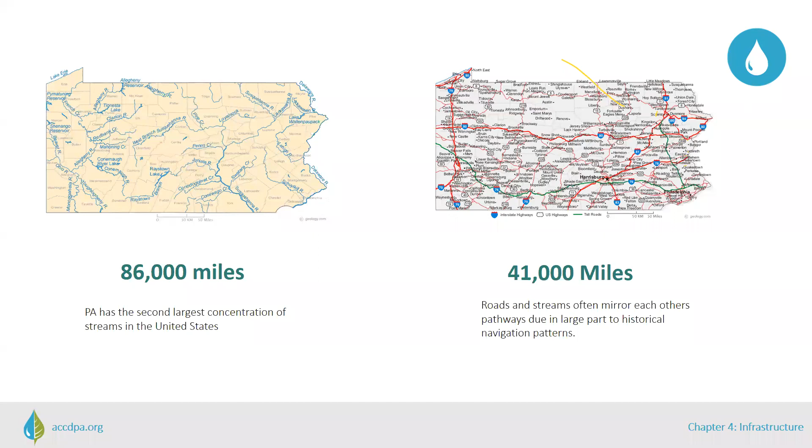Roads and other infrastructure impact streams in several ways. Over time and with daily use, road conditions can deteriorate. As this gradual erosion happens, that sediment can be transported and deposited into streams. Dirt and gravel roads in particular can dump large quantities of road material into streams, particularly during storm events.

I'm going to play this short clip of a dirt and gravel road in our county. This road was part of a Dirt and Gravel Roads grant project. We helped to install some improved drainage features to reduce the impact this road has on the stream parallel to the road surface. If you take a look, you might notice how the water is creating these deep cuts in the road surface. Where do you think that material is going?

Now notice when the road surface changes. This change that we see in the clip is where additional drainage methods were incorporated in order to manage the stormwater more effectively. This had two important outcomes. It reduced this road's maintenance and improved its overall functionality, but it also reduced sediment loading and improved stream health in this particular section.

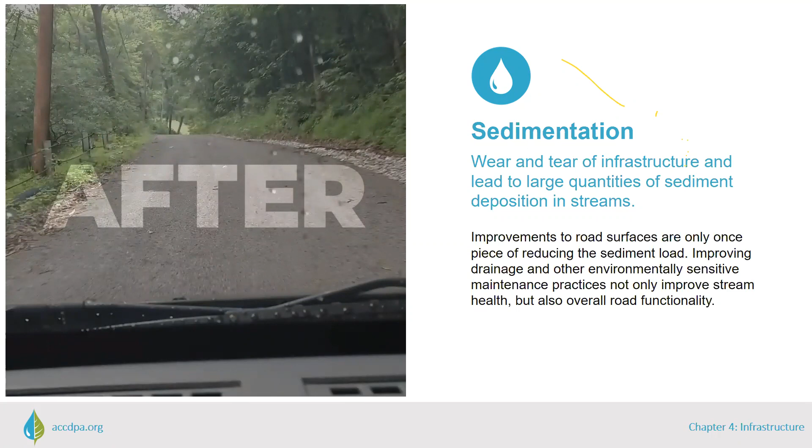There are ways that roads and infrastructure can contribute sedimentation in streams, but they can also be impacted by natural processes of erosion and sedimentation caused by the streams themselves. Remember, streams are constantly changing. As I mentioned, the location of roads in close proximity to streams was very convenient at the time, but now there are plenty of instances where streams are cutting into the road.

Here's one photo of a paved road in Allegheny County on the outside bend of a stream. Below the road, we can see how the stream is cutting into the bank and has even exposed an old utility line. If this was an active utility line, it could be a dangerous situation. If the line became damaged, it could also discharge pollutants into the stream itself.

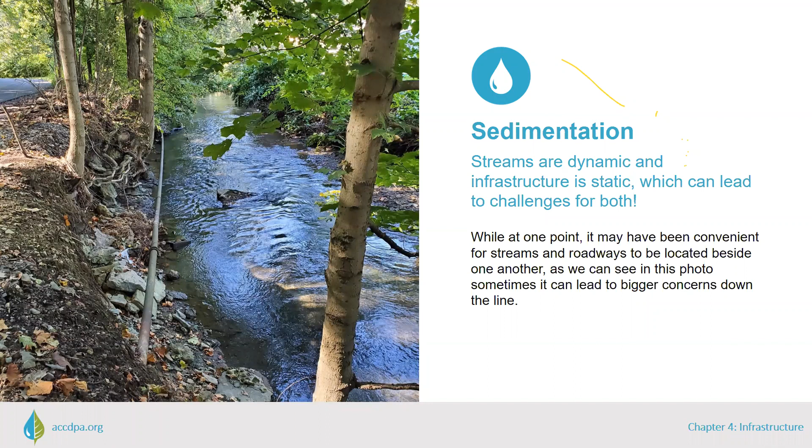Water and infrastructure is all about flow. How is the water moving across the surface and finding its way into streams? These flows of water are often referred to as drainage patterns, which can become disrupted through the installation of infrastructure. For roads, this can mean changing the topography or diverting drainage using berms or ditches that trap water or convey it in concentrated runoff. Concentrated runoff can carry with it road salts, litter, sediment, oil and gas residues, and other pollutants that then enter the stream without any opportunity for treatment beforehand.

These pollutants change the stream environment and can harm wildlife. Road salts, for example, can increase the salt content of streams, making them uninhabitable, in some cases, for freshwater fish. This picture is obviously not from around here, but I picked it because you can see how the road is cutting into this natural landscape and could be changing the way water is flowing across this surface.

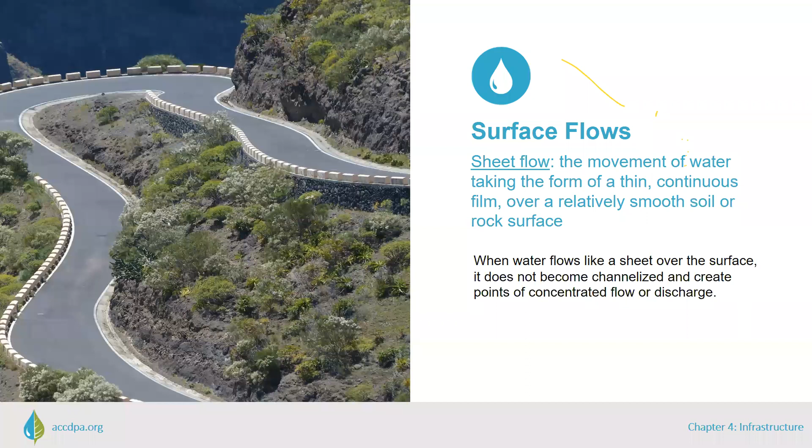Other infrastructure designs can also alter drainage flows. The first two images here represent changes to surface flow to purposefully concentrate runoff. But as you can see, the water has a mind of its own and has eroded the area around the pipe in this first picture. This second picture shows what a concentrated flow might look like as it enters the stream. These infrastructure designs are made with the human use in mind, but both streams and infrastructure systems tend to have better health and durability when working within the flows of nature.

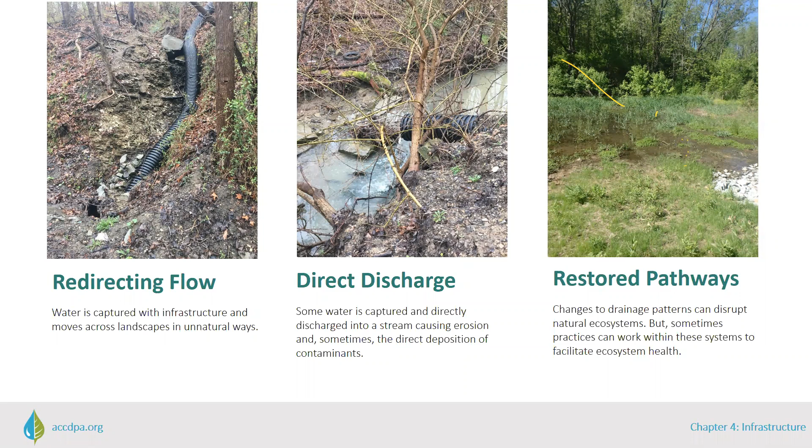I want to briefly mention, before I continue with the problems that arise between streams and infrastructure, that the story is not all bad. This third image is a positive one I wanted to make sure I stuck in here. This was a road drainage project that was part of a low volume road grant, and this project captured stormwater and natural springs that were flooding the road and diverted them into this grassed area, which became a restored wetland. Wetlands are great because they help in protecting water quality and also provide important habitats for wildlife.

Another type of drainage interruption is impervious surfaces. It seems pretty obvious that a parking lot would not allow stormwater to infiltrate in the same way that an open field might. But there are additional concerns regarding how water is conveyed from these impervious surfaces into nearby water bodies. With an impervious surface, pollutants and materials carried by water do not have the opportunity to filter before entering the streams and waterways. So we see similar issues with roads and concentrated flow that I mentioned in the previous slides. Take a look at this graphic.

Notice how in the impervious ecosystem on the right, we have 55% of the water being transported as runoff, versus the situation with natural ground cover where 50% of the water is infiltrating. Imagine the sheer volume of water and the impact it might have when we think about the fact that an inch of rain on just 1 acre of land is 27,154 gallons of water.

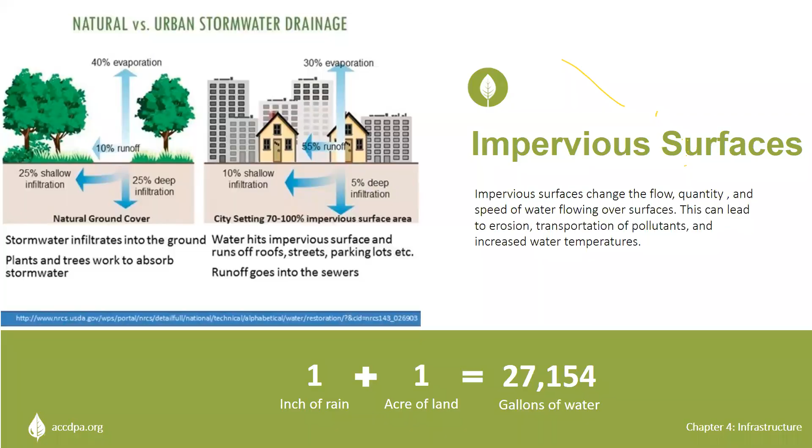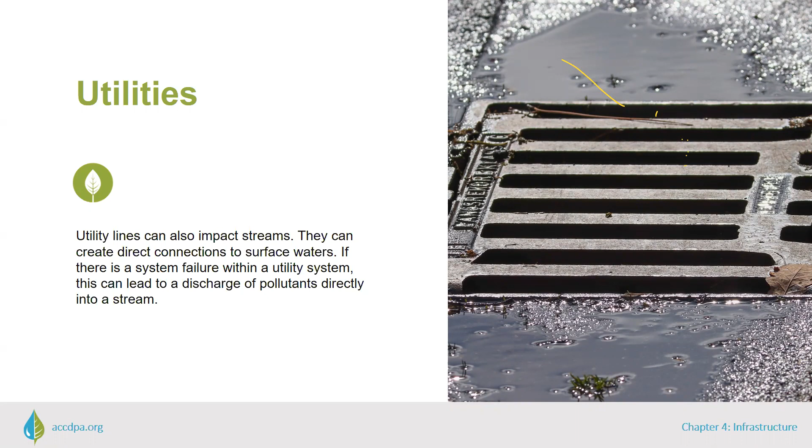In addition to interrupting drainage patterns, infrastructure like utility lines can also impact the health of a stream. Utility lines, like roads, are often located beside streams for both convenience and access for maintenance. These lines can cause damage to streams during installation, as well as during routine maintenance because of the disruptions to the habitat and ecosystems while work is being performed. In some cases, damage to utility lines can also cause issues with materials being deposited into the stream. In extreme cases, burst sewer lines can lead to disastrous stream health consequences. But even in more mild cases, damaged utility lines discharge materials into a stream that are not designed to be there.

Building infrastructure in and around streams can be tricky business. Some of you may be familiar, but part of the responsibilities at the Conservation District is to make sure that activities that would change, expand, diminish the course, current, or cross-section of a water body are monitored. This happens through our Chapter 105 program, which is delegated to us through the Pennsylvania Department of Environmental Protection. This program focuses on 3 aspects.

The first is permitting. ACCD reviews, receives, and approves general permits, which cover specific structures and activities that might impact streams. Some examples include utility crossings, minor road crossings, and fish habitat structures. A person may not construct, operate, maintain, modify, enlarge, or abandon a dam, water obstruction, or encroachment without first obtaining a permit.

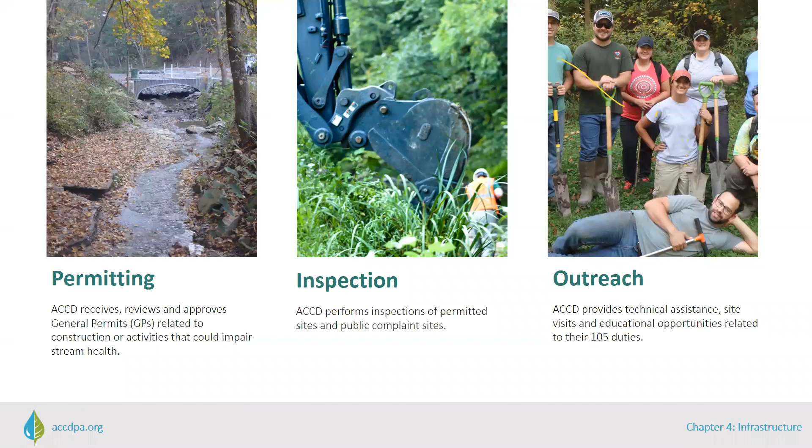The second piece of Chapter 105 is inspections. ACCD performs inspections of sites where we have issued permits or if we receive a complaint about a 105 related issue. And thirdly, ACCD works with contractors and the community to provide technical assistance and educate the general public about our programs. This program can be particularly important when it comes to stream crossings, which I'm going to dive into now.

Stream crossings are another piece of critical infrastructure that can have a big impact on stream health. Stream crossings have a lot of shapes and sizes, from bridges to small crossings on a driveway. The shape, size, and positioning of these crossings can either work with or work against a stream and impact health. Streams are powerful, so when designing infrastructure that will capture, direct, or be used to cross over a stream, there is a consideration for the ebbs and flows of stream surges.

One approach to this has been to think about the velocity and power of a stream and if the water were to shoot through the pipe. This was a pretty typical way that structures were engineered. Designing a stream structure to handle the flow of water considers a stream from an engineered perspective rather than an ecosystem perspective. And as a result, structures that focus on quantity and velocity of water over environmental components of a stream can lead to issues.

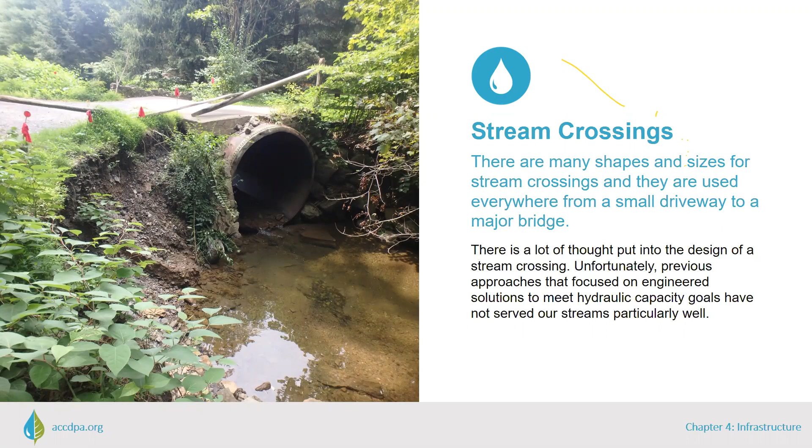There are 4 examples I'm going to talk about today that relate to how undersized stream crossings can negatively impact stream health. They are that it disrupts stream continuity, decreases or increases flow speeds, creates ponding, scouring, and erosion, and can cause flooding.

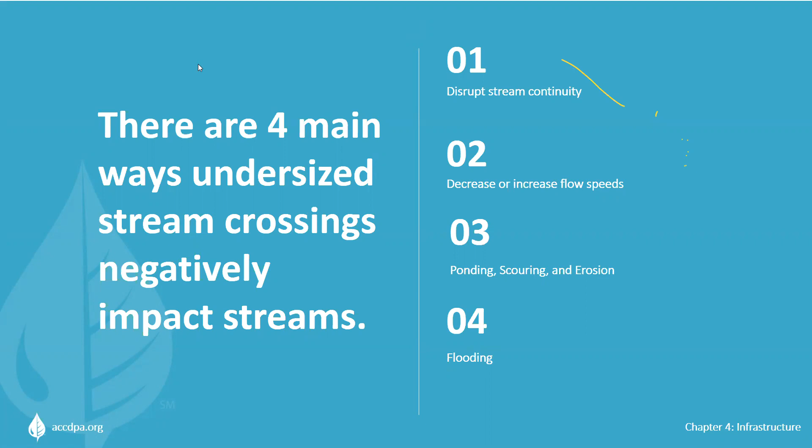Stream continuity is the concept of keeping the stream connected and unbroken. The connection of streams to riparian and upland areas is an important issue for species in aquatic ecosystems. These creatures rely on an ability to move unimpeded both daily and seasonally through streams and nearby areas. This navigation through our streams and river systems requires the ability to find shelter, escape danger, search for food, and maintain genetic diversity.

Installing stream crossings can disrupt this continuity in ways that threaten the needed access to a variety of habitat areas. This pipe is a prime example of broken continuity. The angle and the drop of this outlet would make it difficult for aquatic species like fish to use this crossing as a point of connection in reaching the resources upstream.

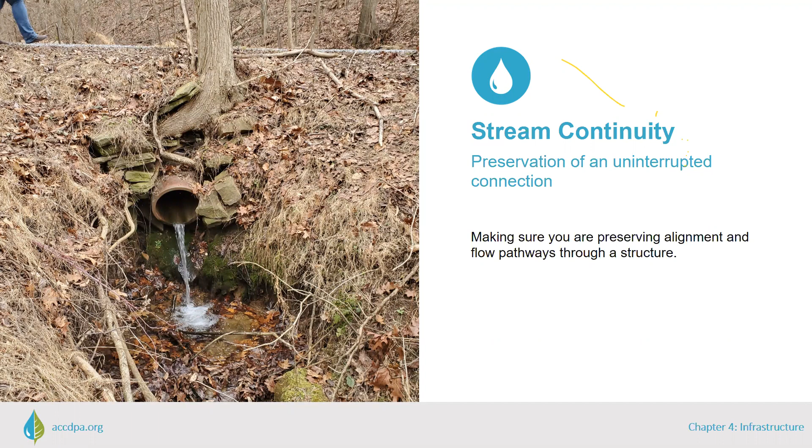Undersized stream crossings can also create a variety of problems associated with flow speeds. Water speeds are higher in constricted crossings than it would be naturally upstream or downstream. The problems with these fluctuations in flow speeds are twofold. First, the high flow conditions can deteriorate the condition and integrity of the crossing. Also, during flooding events, the structure can be filled with this faster moving water, which will exacerbate any deficiencies.

Low flow speeds can make passage through a pipe by aquatic organisms nearly impossible. Fish and other aquatic organisms require sufficient water depth to move through a stream crossing. And low flow conditions can lead to stagnant conditions in a crossing, and that can cause bacteria buildup.

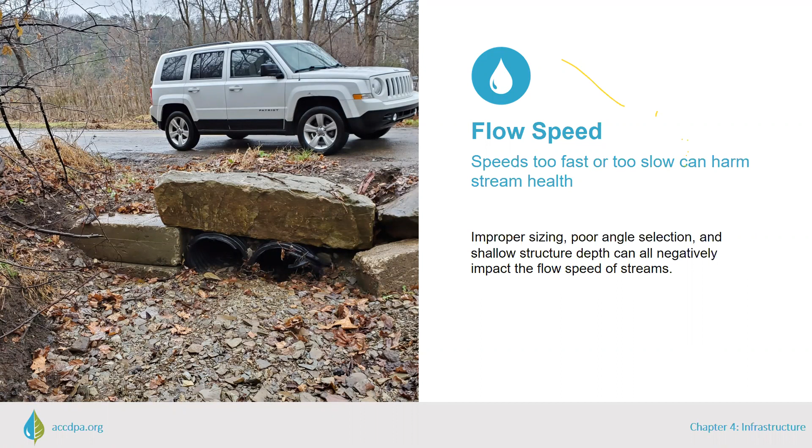Ponding at the entrance of a pipe and scouring at the exit and erosion at either end can be another major issue with undersized structures. With an undersized crossing, there's restricted flow entering the structure, and this can cause water to back up upstream of the crossing. This backup is also called ponding and can lead to property damage, road bank erosion, and severe changes in upstream habitat. But ineffective stream flow through a crossing can also cause issues downstream of the structure.

Riverbed scour occurs when the shear stress induced on the riverbed by flowing water exceeds the resistance of the channel bed material. This downstream scouring and erosion degrades habitat for fish and other wildlife. Construction or changes upstream or downstream of a crossing can influence the river flow and channel morphology. High flow velocities in particular can exacerbate erosion. If a crossing is not properly embedded in a stream, this erosion can undercut the structure, which degrades its integrity and also impedes upstream passage.

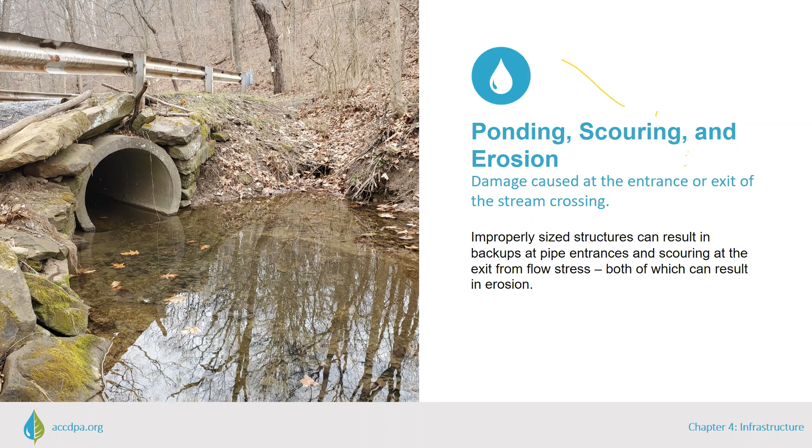This last issue is one I'm sure folks on this webinar can relate to, and that is clogging and flooding. It's not uncommon for materials such as woody debris and leaves to flow down through a stream. And in more urban areas, there are other treasures we might find. I've seen all kinds of things floating in our rivers and streams like cinder blocks and tires.

But the ability for these materials, organic or not, to pass through a stream crossing is pretty important because otherwise the structure can become blocked. This not only limits passage through the structure for organisms, but also can lead to flooding. Everyone hates flooding, and it can contribute to further issues like erosion and sedimentation into streams.

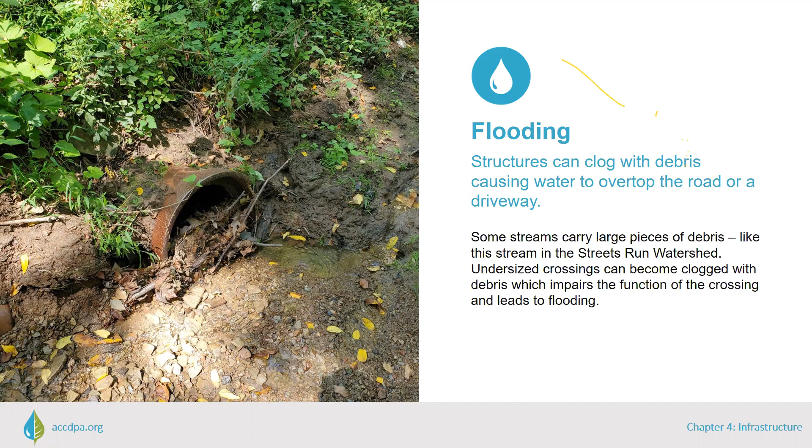So we've looked at these 4 key issues that arise when stream crossings are installed and sized improperly. And the key message to take home from looking at these stream crossings, pipes, and culverts, is that sizing matters. Ensuring that the built and natural environments are not in conflict is important for both human and natural uses of the landscapes.

This webinar is about problems, but also possibilities. So let's talk about the ways we can work more effectively within our infrastructure needs to improve stream health. Solutions, if you will. We're going to have 2 webinars, like I mentioned, that focus specifically on homeowner and municipal action points. So I will not go into too much detail, but I wanted to touch on some solutions that homeowners and municipalities can take to improve the relationship between infrastructure and streams.

Some general solutions that everyone should be considering when we design stream crossings is keeping the ecosystem in mind. So what does this mean? Well, first, we can think about a stream crossing that meets what is called bank full width. Bank full width is the measurement across a stream from bank to bank at the height the water would be during a bank full water flowing event. This is a bit of a complicated concept, but if you find yourself in a situation where you need this measurement, give the Conservation District a call and we can help.

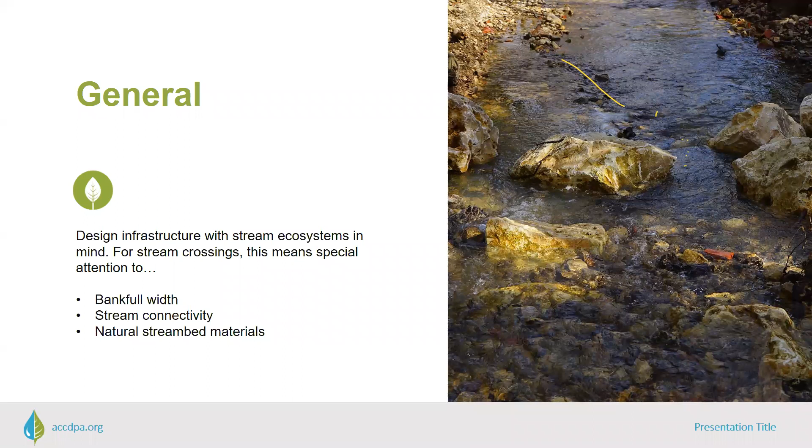If you're a homeowner and you're looking to replace a small crossing in your driveway or what have you, look to make sure that it is the correct size. But in addition to stream crossing considerations, there are small steps you can take as well. Do things like try to avoid littering along roadways. As we've talked about, improper drainage can cause surface flows to carry that litter into streams.

Another simple thing you can do is try to limit your own installation of impervious surfaces. This will help to increase infiltration of stormwater and can create vegetative areas where water can flow through and be treated before entering a stormwater system. You can also use these to help reduce areas of concentrated flow.

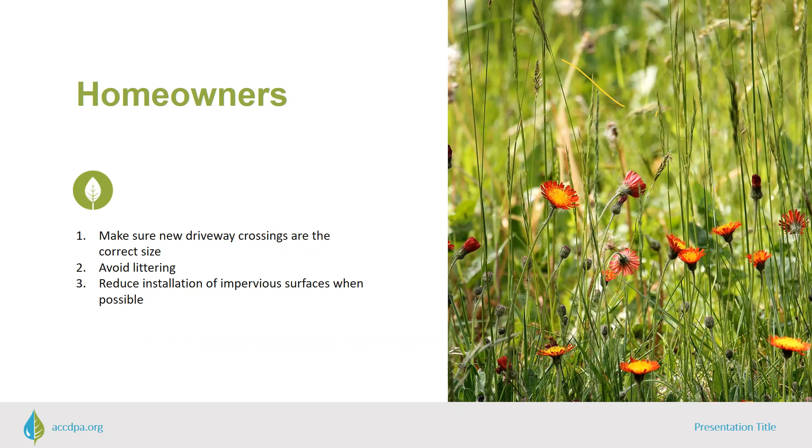From a municipal perspective, there are some more things you can do because of your authority to work on and improve infrastructure systems. So one thing that can be done is identify stream crossings that might be undersized and prioritize them for replacement. You can also prioritize drainage improvements to roads that improve the flow of water and decrease concentrated flow and filter contaminants from the roads before entering waterways. In particular, this is super important on roads closest to streams.

You can also work to preserve green space, and that's another very simple piece of the puzzle that can make a big impact. You might be thinking this is way easier said than done. Road projects are expensive, especially stream crossings. Well, funny you should be thinking that, because another municipal solution I have here is to ask your local conservation district about the Dirt, Gravel, and Low Volume Roads Program.

This program funds municipalities to make environmentally sensitive road maintenance improvements along dirt and gravel or paved roads with fewer than 500 cars per day. I can include some more information on this program in my follow-up email if anyone's interested in learning more about this particular funding source.

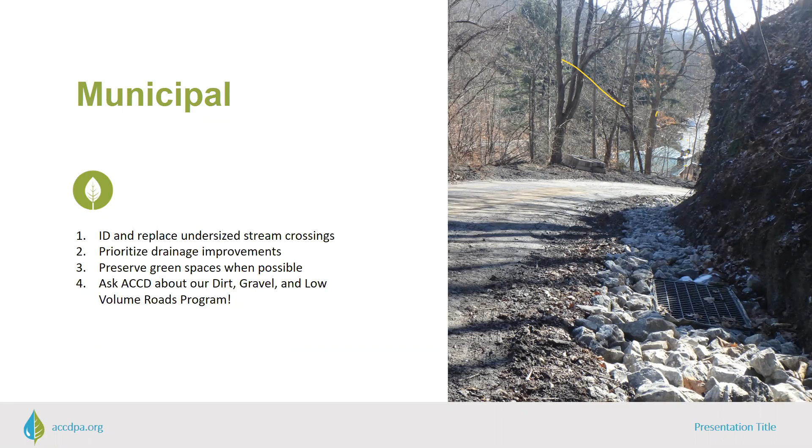Lastly, it's important to know what you're looking at. Try to become familiar with proper erosion and sediment control measures. These are often installed during road projects near streams and can help reduce negative impacts of sediment deposition into a stream. Ensure stormwater is properly addressed and that runoff is diverted and treated as it exits roadways and before it enters streams. And finally, contact your local watershed group or conservation district to ask about how to further support stream health in your area.

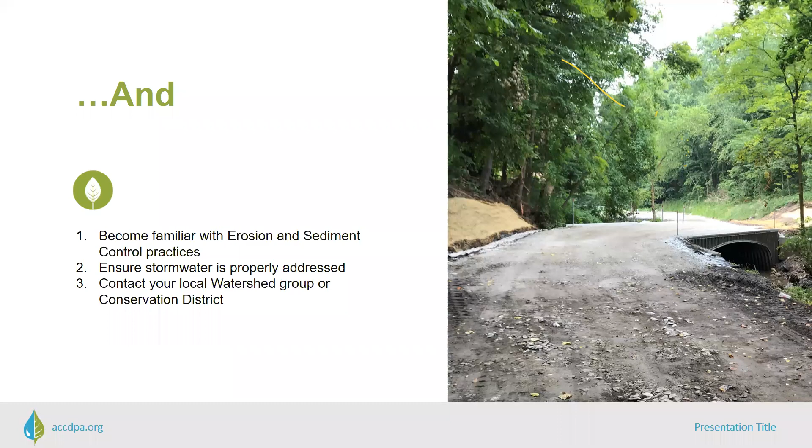I'm going to wrap it up here with 3 take-home messages. So number 1, remember always that streams are dynamic and infrastructure is static, which can create challenges for infrastructure maintenance and stream health. Secondly, infrastructure can negatively impact stream health by changing drainage patterns, leading to increased deposition of sediment and other pollutants. It can alter habitats for stream wildlife, which can have consequences for food sources, shelter, and mating.

And finally, consider the needs of a stream ecosystem when designing and implementing infrastructure. Include areas where sediment and stormwater can be filtered through vegetation.